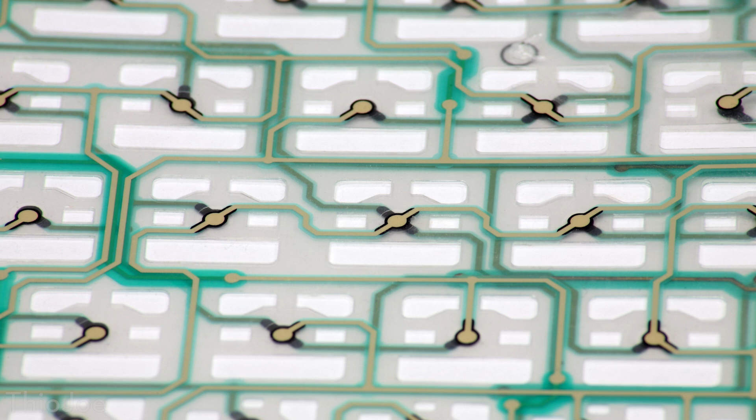The first thing you need to understand is what a typical regular old keyboard is. If you just go to the store and buy the cheapest basic keyboard you could buy, it's probably going to be what is called a rubber dome keyboard, also called a membrane keyboard. The structure of these types of keyboards is very simple, very cheap to produce. It's basically just a PCB board, a circuit board, with disconnected circuits for each key, and then you have this rubber membrane that has domes sticking out of it. The keys simply line up with these domes and get pressed down, and the domes provide a little bit of resistance at first, but then eventually they collapse when you press enough pressure, and there are contacts on the bottom of the dome that close the circuit on the PCB board, allowing the thing to be connected, and then that sends the signal.

The reason these are so popular, again, is because they're so cheap to make. It's just a circuit board, which can be printed on and mass-produced, and then you have a silicone rubber mat, which can just be injection molded or whatever. That's super cheap to make. And then you have the keys that sit on top of it. Super duper simple - you just press down. There's not really much going on there.

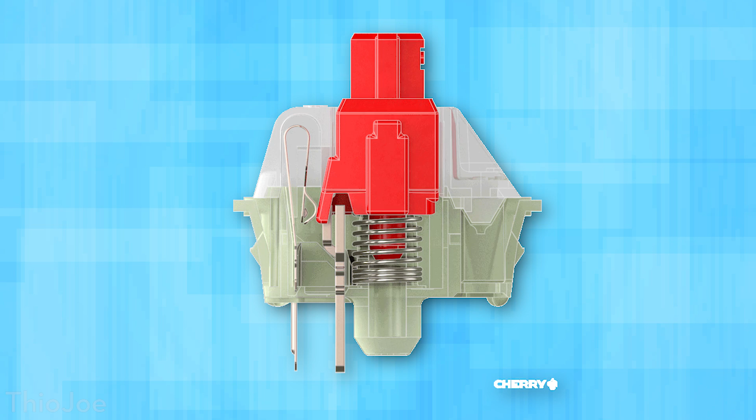A mechanical keyboard switch, on the other hand, works on a different principle. Instead of pressing down and making contact with the board, you have two metal contacts, one of them under tension, and a plunger which gets actually pressed down. When you press down on the key, it moves the plunger out of the way, allowing one of the contacts to actually touch the other contact. So it's basically blocking it until you press down, then it moves out of the way and makes contact that way.

So then why are mechanical keyboards considered better? One of the bigger reasons is because they are a lot more comfortable to type on. This is obviously subjective, but there's also a lot of different types of mechanical keys you can get, which you might like better than other types, which we'll get into.

With rubber dome keyboards, they're all going to feel really the same. You press it down, you have to press it all the way down until your finger pretty much hits a solid surface, which is when they make contact. So if you're doing a long typing session where every single key you hit has to basically strike all the way down onto a hard surface, that can get a little bit fatiguing, maybe even annoying to type on. And if it's a particularly cheaply made rubber dome keyboard, you might have to press down harder, and again, you're just striking your finger on this hard surface the whole time. It doesn't really feel like that, obviously, because the rubber's providing some support initially, but you are pressing all the way down.

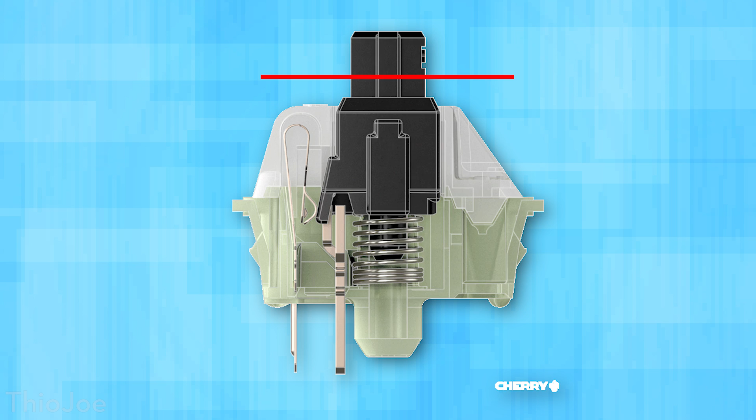With mechanical keyboards, on the other hand, the switch is not reliant on the key being pressed all the way down and hitting the PCB board. Instead, that switch is activated whenever the key moves down enough to the point where the contact is able to move. So you don't have to press the key down all the way to the bottom for it to be activated, so they have a little bit of give to them, so they're a little bit more comfortable.

And also, there's a ton of different types of mechanical keyboard switches. One of the most popular brands is called Cherry. They make a line of switches called Cherry MX, and typically this is what you're going to see if you just search mechanical keyboard. Probably all of them are going to have Cherry MX switches in them, unless they're using Chinese knockoffs or something, or some companies have made their own types of mechanical switches. They're really similar, but again, we'll get to that. As for Cherry though, we're going to go over these because they're the most popular ones.

They have different types of switches that are named after different colors based on different properties. For example, they vary in whether they have an audible click or not, whether they have a tactile bump when you press down or not, and also how much force is required to be applied when you press down the key.

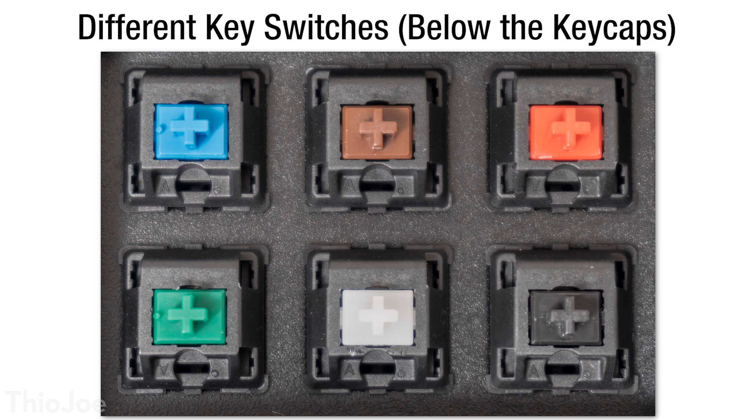Here we can go over what are the most popular types of these keys.

The first type of these are Cherry MX Blue switches, and these have both a tactile bump so you can feel when it activates. When you press down, it'll give way quickly, and you'll also hear an audible click, so they're pretty loud. They do feel pretty cool to type on, but if you're around people, in an office or a dorm, this is going to be really annoying because they are very loud. It's also a very distinct sound. If you hear someone typing on one of these keyboards, you'll know that's a mechanical keyboard, probably Cherry Blue switches. It's almost instantly recognizable.

There's another similar one to blues, which are Cherry Greens. They're pretty much the same exact thing as Cherry Blues, with the audible click and the tactile bump, except they require more force to press down on.

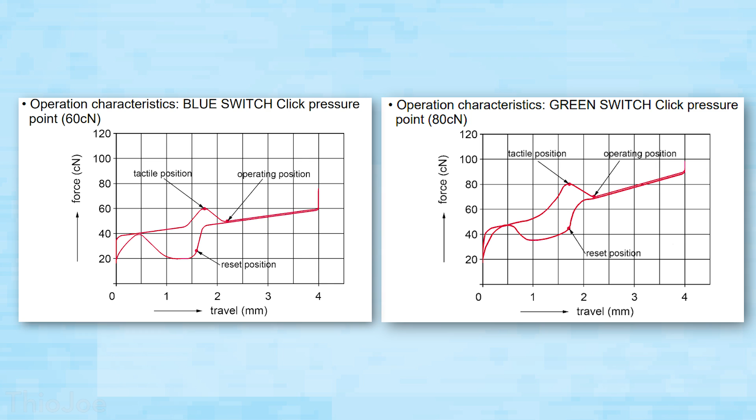Now the next type of switch, which is really popular, especially for gaming keyboards, is Cherry Red switches. That's actually the kind that I have right now. I used to use blue switches, but they got kind of annoying, and I think red switches are just fine, fun to type on. The properties of these are that there's no tactile bump, and because of that, there's no click sound. Also, they require a lower amount of force.

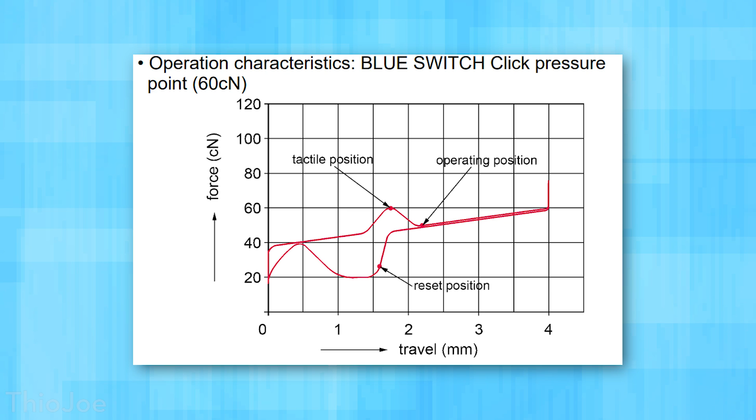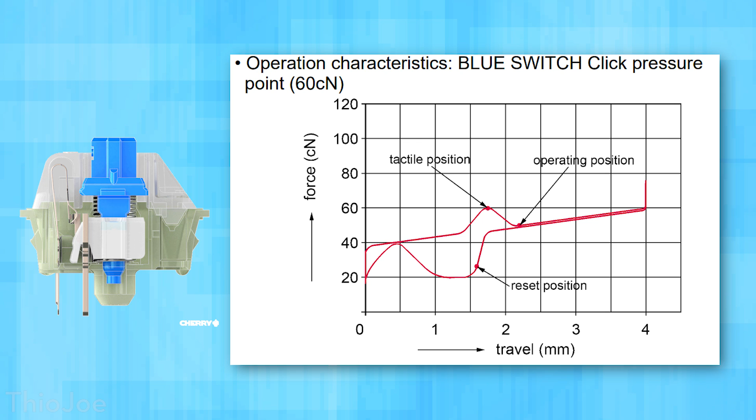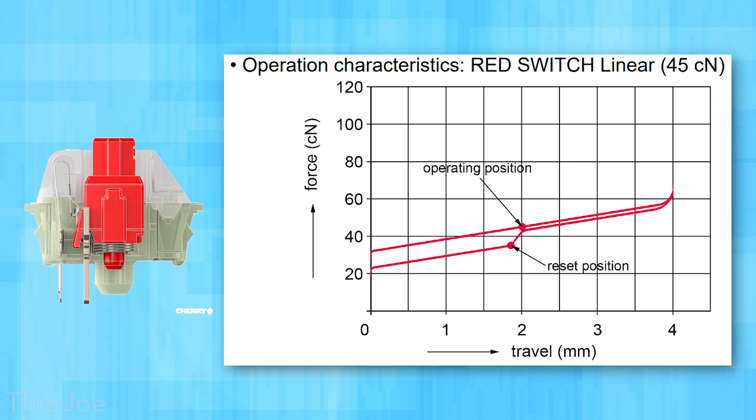Another thing to note is with the blue switches, the way the click mechanism works is it's a wavy force profile. You start pressing down, and as you get closer to the activation point, the amount of force and resistance gets a lot higher. You press down and then it clicks, and a mechanism gets released, and then a lot less force is required. So it's like you have to press hard, then not as much. Whereas on red switches, it's pretty much linear, so the amount of force required is very smooth and doesn't change depending on how far you press down. Again, you don't need to press the switch all the way down, it's like halfway, but that's just the way it feels.

A similar switch to Cherry Reds are Cherry Black switches. They're pretty much the same, no audible click or tactile bump. They just require more force than the red.

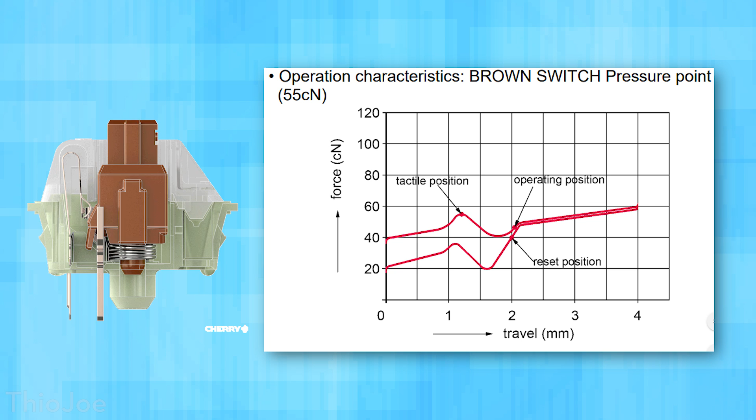The next major common type of switch are Cherry Brown switches. Unlike blue, these do not have an audible click, but they do have a tactile bump, so you can actually feel exactly when you activate the switch. You're pressing down, you'll feel it give way, and that's when it activated. But you can keep pressing it down, unlike a rubber dome. There's also a cousin to the brown, which are the Cherry Clears, which again are the same thing, they just require more force.

So clearly you have a lot of choice, unlike rubber dome, where depending on the manufacturer and the quality, there might be more or less force required. One of the advantages of going with a mechanical keyboard is you can know exactly what brand and type of switch it's using. So you can say, okay, I really like Cherry Red switches, so I'm going to buy whatever brand I like, whether it's Corsair or Cherry keyboards directly or Thermaltake, whatever manufacturer, as long as they're using Cherry Red switches, it's going to feel the same. Then you can just get whichever keyboard you think has the best features on the side.

More recently, Cherry has made some other types of keyboard switches that are less common, maybe becoming more popular. One of these is silent red switches, also called pink switches. The idea is these are the same exact thing as the Cherry Reds, except they're structured a bit differently so they're more quiet, super silent. Cherry Red switches are already the most quiet, I believe, so this is just going to be super quiet. They've also made so-called Speed Silver switches, which again are like the red switches, except they require shorter travel distance, so you don't have to press them down as far for activation. This is kind of for gaming, so the idea is if you're doing a lot of movements, your finger doesn't have to move as fast, maybe giving a faster response, but you can decide that when you go to use it.

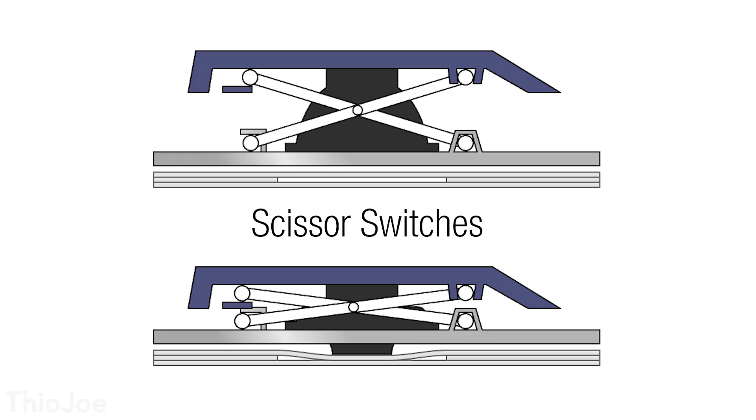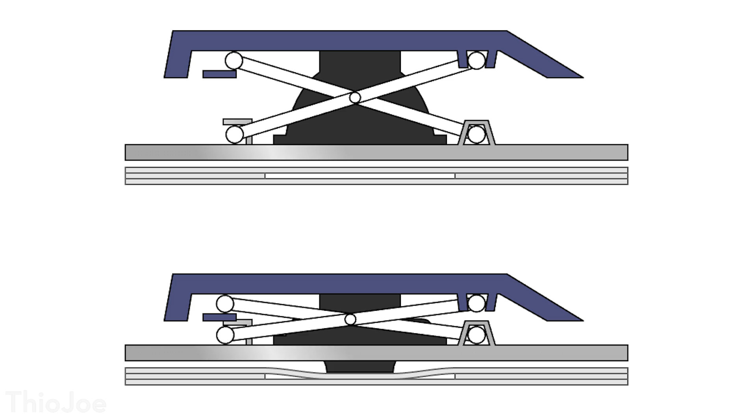Now you might be wondering, are there other types of keyboard switches? Yes, there are. For example, there's a scissor type switch, which is basically like a very thin rubber dome with interlocking plastic pieces. They're similar but thinner than a rubber dome, which allows them to be put on laptops. Apple has their own proprietary version called butterfly switches, although for me personally, and a lot of people say this, they're not very comfortable to type on because they don't have much travel distance at all. If you're typing a lot, it feels like you're just slamming your fingers on a solid surface, even less than a rubber dome.

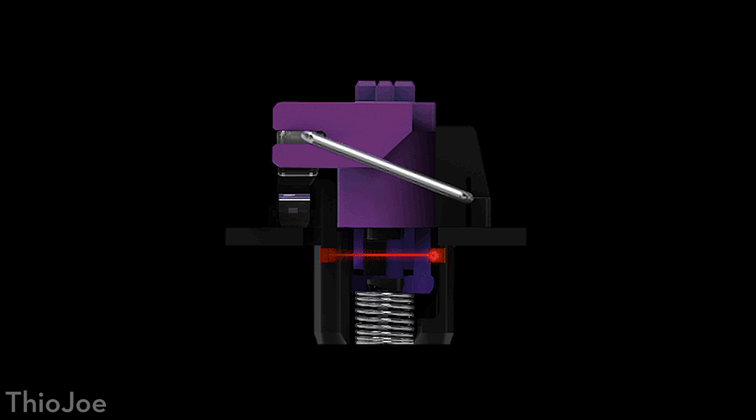And then there's even these new laser type switches, which instead of having a mechanical keyboard switch where the plunger blocks the metal contact from making contact with the other one, it's the same idea except with a laser or light. The plunger blocks a light from entering a sensor, and when you press it down it moves out of the way and allows the laser to pass, so the computer knows this key switch was pressed down. I think it's a bit ridiculous to have a laser keyboard switch, and I've seen marketing like 'a keyboard switch at the speed of light,' but I don't think it's going to be any faster because you still have to have the light cross, then that diode converts it to an electrical signal, and that signal gets sent. So how is it going to be different than a straight physical electrical connection? It's not going to be any different.

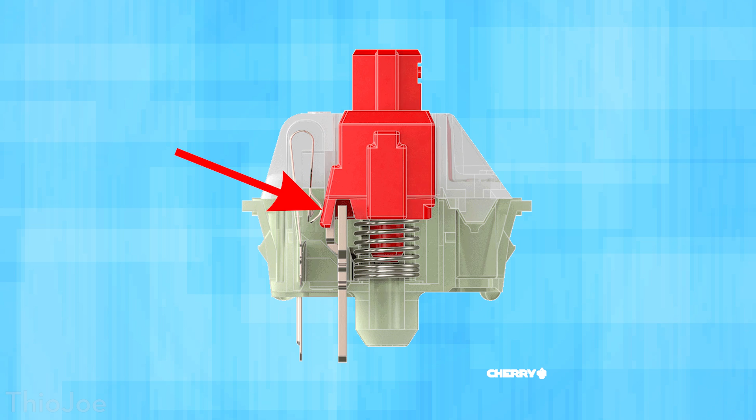Though I do think the advantage of a laser switch is that you can completely separate the actuation mechanism from the activation mechanism. With a mechanical keyboard switch, the actual plunger touches the contact and is held back, so when you push it down there's extra resistance from trying to reach the other contact. Whereas with a laser, light is not going to be pressing on the keyboard switch at all. So you might have a little bit more flexibility in the design, but at this point I don't think it really makes a difference.

Now at this point you might be thinking, well, I definitely want a mechanical keyboard, but what kind of switch should I get? Really, this comes down to preference. If you had to go in blind, a lot of people like the Cherry Red switches, and I think they're fine. But you will want to try these out ideally before you buy. A lot of times if you go into a store like Best Buy, they'll have these keyboards on display, or at least a lot of the keyboard boxes have cutouts so you can press on some keys and really feel what it means by no tactile bump versus what a tactile bump feels like, and get an idea. You really should be able to feel it before you buy it.

Probably the most common switch for gaming is some variation of the Cherry Reds, whether it's the Cherry Red with speed keys that have less activation distance, or the silent ones. Those are pretty popular, and I think they're pretty nice to type on as well. There's no resistance or anything, so they're really easy to type on. But like I said several times before, it's going to come down to preference. Hopefully this video at least helped you get an idea. If you didn't know anything about these different keyboard switches, or didn't know they were out there, now you'll be a little bit more informed.